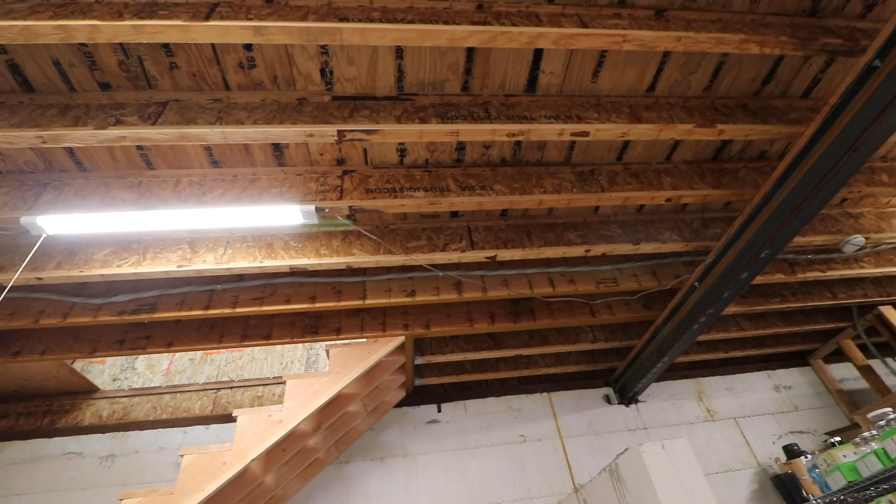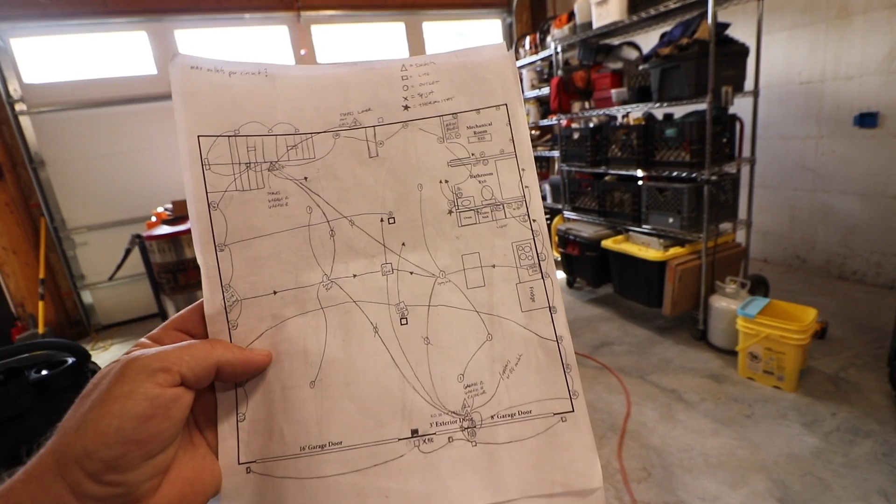So today I want to work on getting things in the ceiling, which is going to be a combination of lights and outlets. I touched on this briefly yesterday, but one of the concerns I have is the fact that we have an I-joist floor deck, and there are restrictions and limitations on how many holes and where those holes can be located in these joists. They're an amazing material that allows us to span distances we probably wouldn't otherwise span, and give us a comfort in the floor that's not easily duplicated, so they're a great option.

The challenge really lies in the fact that we have wire going everywhere, and it's not just the wire that's a problem. We have bathrooms, HVAC, and kitchens, so there's a lot of things that actually need to go through this flooring assembly, and we don't have everything crystallized yet, so it's not obvious where, for example, the ducting is going to go for the HVAC. Maybe somewhere through here, and then it has to go to each bedroom and the living areas. And then also the soil stacks for the kitchen and bathroom will need to run over here and join the main going out to the septic system.

So we know there's going to be a lot going on in the floor, and because of that, with the electrical, we have a lot of discretion, because there's not really a limitation on the length of the wire per se. So we have a lot of control where to put wires. We don't have to run them in a specific place, unlike the plumbing and HVAC, where length becomes a major problem.

I talked to an electrician about this situation, and I have a couple of different sets of house plans from other people's houses. I was looking at the electrical schematic, and it's interesting to me that a lot of this decision making is kind of inferred, or left up to the electrician to make the best decision. It's not very crystal clear, like this wire goes this many inches from the wall for this far, etc.

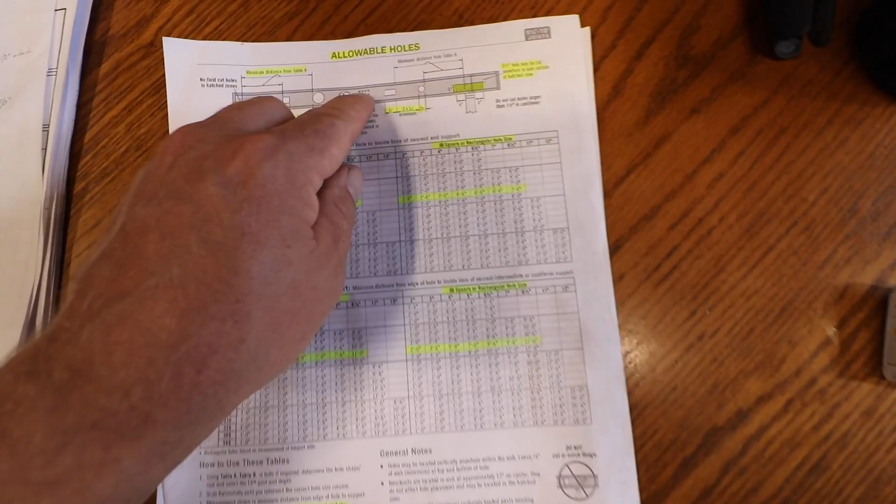It's more like, we want a switch on that wall and we want it to control that light, and the electrician has to decide how to get power to the switch or to the light and so on. So I'm a bit more detailed because we just need more detail—we're not in this industry, we don't understand the norms or the standards. So we're trying to be overly specific so there's no confusion and it's more obvious what to do.

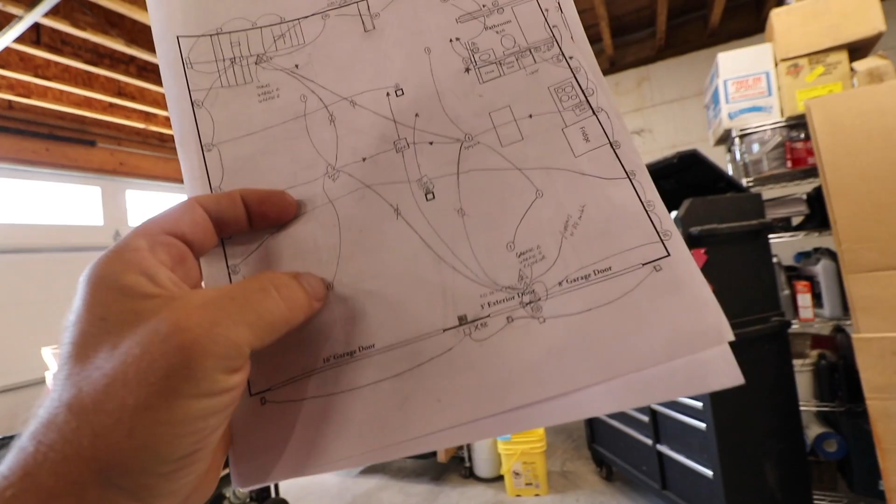So today we're going to be wiring the boxes into the ceiling. I'm not going to run any wires, I just want to get the boxes set up where power is either going to be coming into the box from the circuit, or leaving the box and either going to a switch or going to a light.

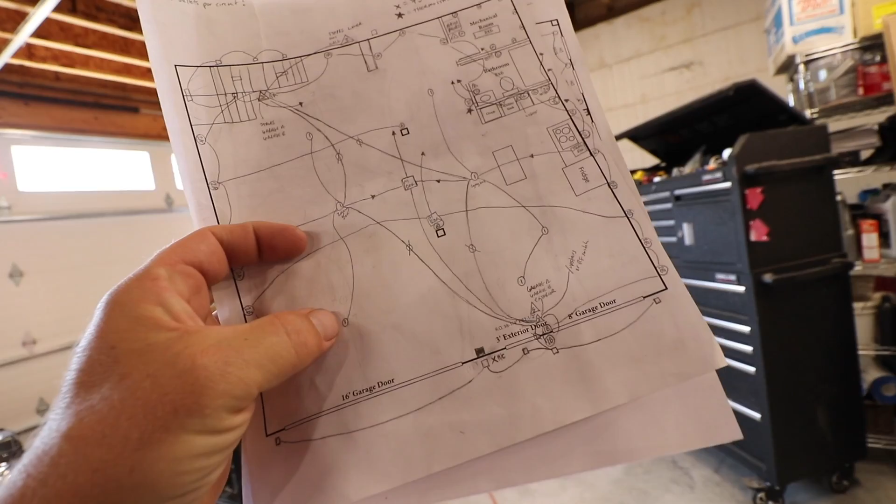We have an electrician coming by in a few days to walk through all this stuff with me and make sure I'm doing things well, that they're thought out, and that it's going to work the way we want with no issues, and ultimately that we're up to code so the inspection doesn't backfire on us.

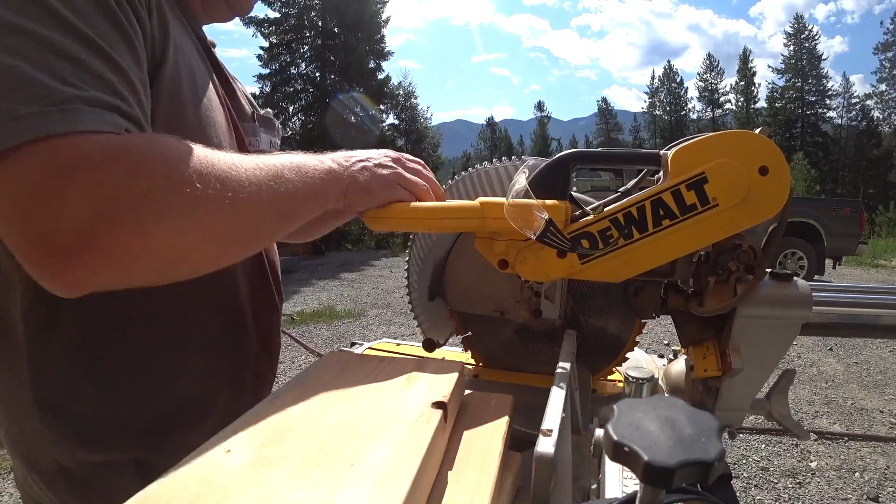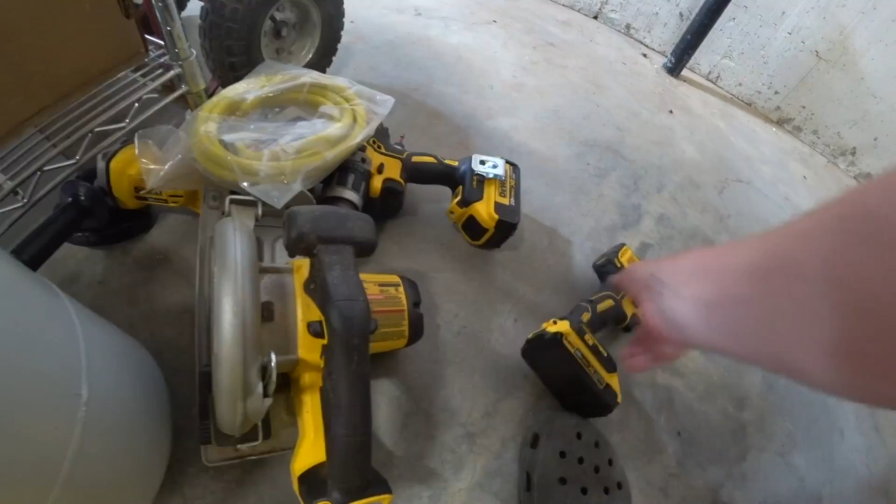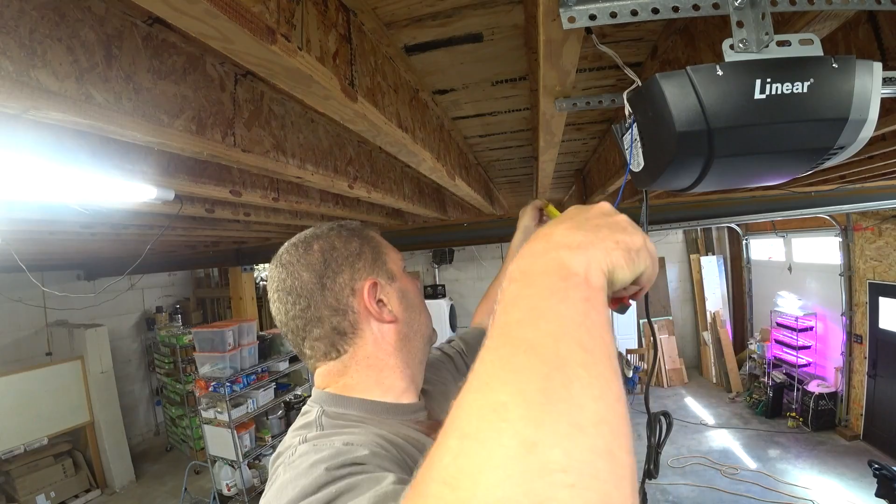I showed this sheet in yesterday's video. This is from the manufacturer of our I-joists, and there are different joist depths and different series within a depth. We have an 11 7/8 joist that's a 360 series, and it gives us a table of hole sizes. We can drill a 5-inch hole, but we have to be 3 feet 6 inches from an end support. This hashed area is off-limits to drilling entirely, and to drill a 5-inch hole we'd need to be 3 feet 6 inches away.

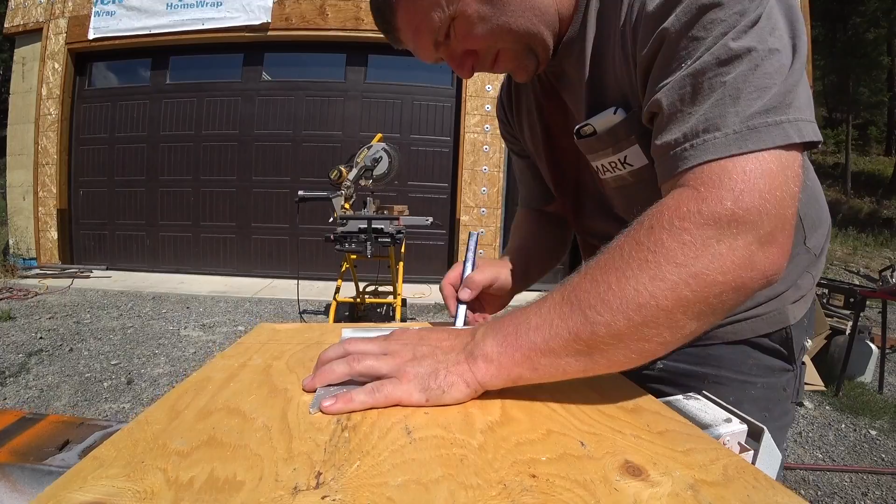This table is something we'll refer to more with HVAC and plumbing, but with electrical we want to be super conservative so we don't drill a bunch of electrical holes in one spot and then later realize we need plumbing right next to it, creating a structural integrity issue.

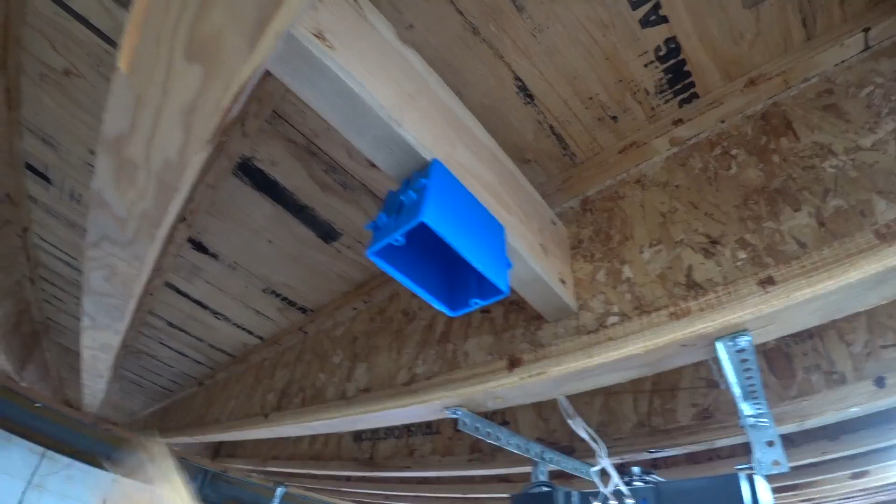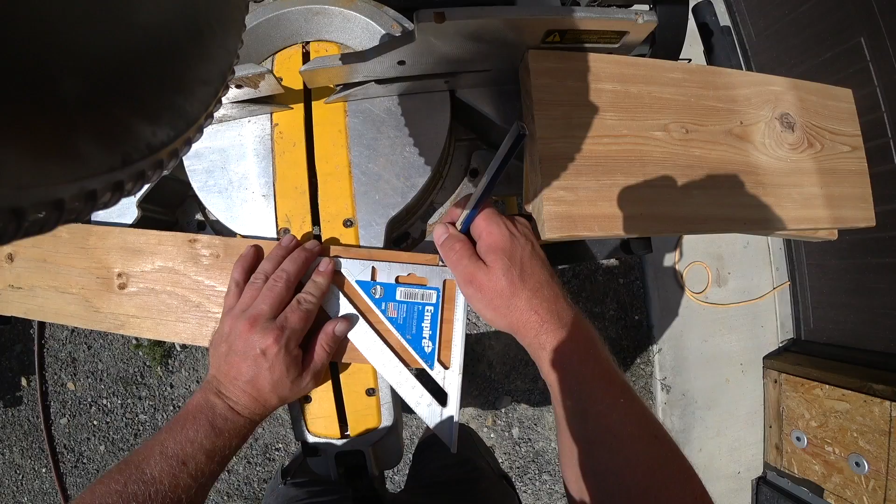The layout of the garage lighting was totally just a circumstantial thing. These lights were actually installed way back before our timber frame even existed. We needed some lighting in here for the timber frame workshop, so I just bought whatever made sense on Amazon, counted about how many we needed, and went for it.

It's kind of weird, but it's actually worked so good, it's been in here for coming up on a year and a half now. So I think we're going to stick with this layout.

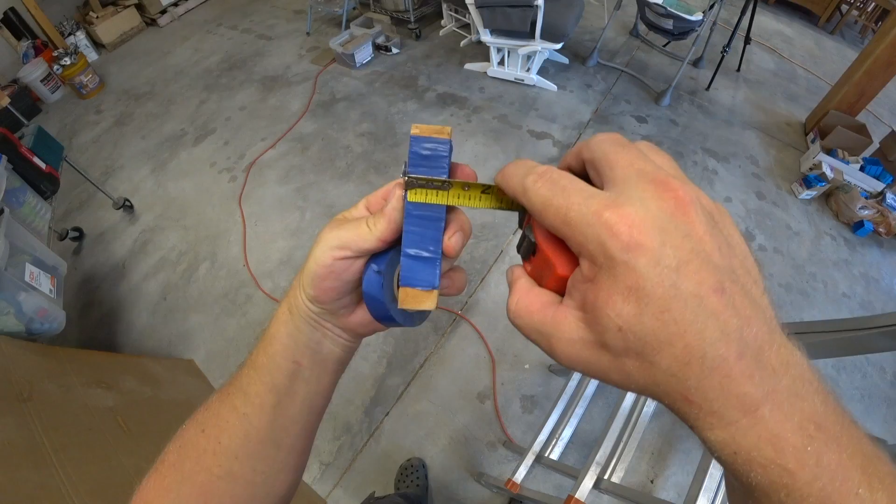The way these lights work is they actually have a regular power cord on them. Because of that, we can run a box over here and put an outlet, then connect two lights into that outlet. So the switch near the door or the stairs will actually control the outlet, and by virtue of that, control the light.

So what we've done is narrowed things down, even though we have 5 or 6 lights on this side and 6 on the other. But we also have a garage door opener, which will be on the same circuit but can't be controlled by the switch, so we'll have to work that out. We're going to use the least amount of boxes possible to control all of these lights.

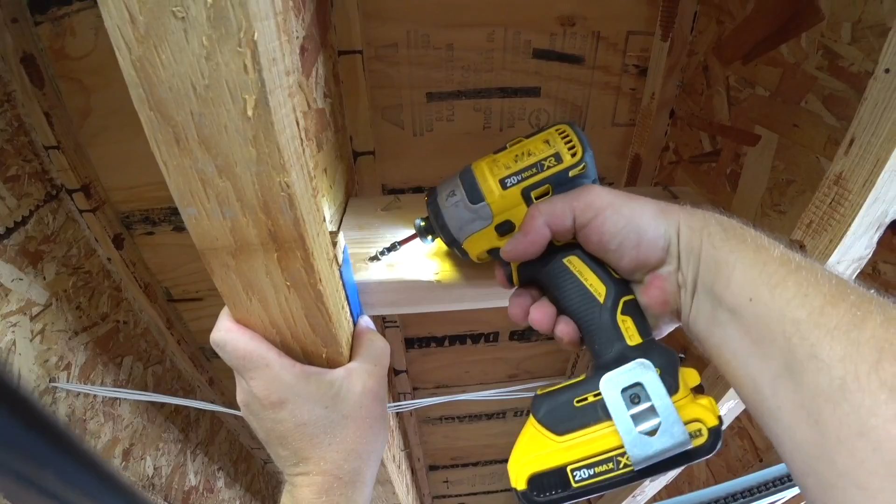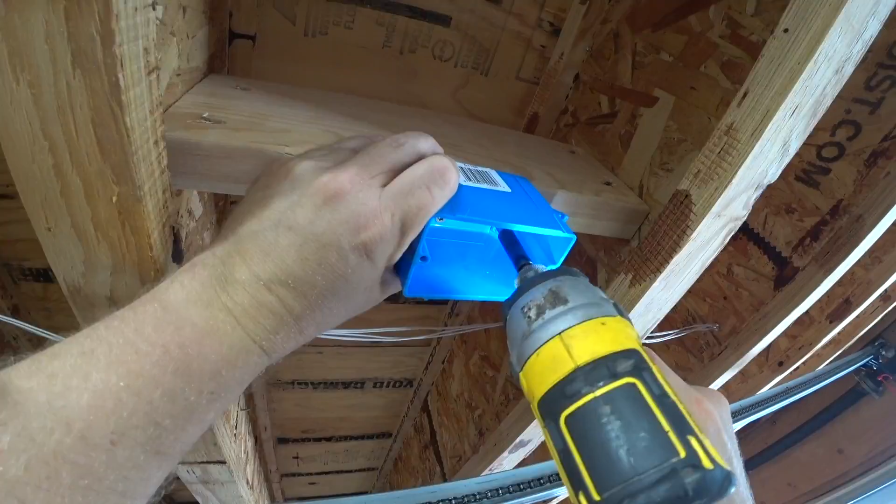Too deep. So what did I do wrong? Totally outsmarted myself — that gap there is actually 1 inch, not 1.5 inches.

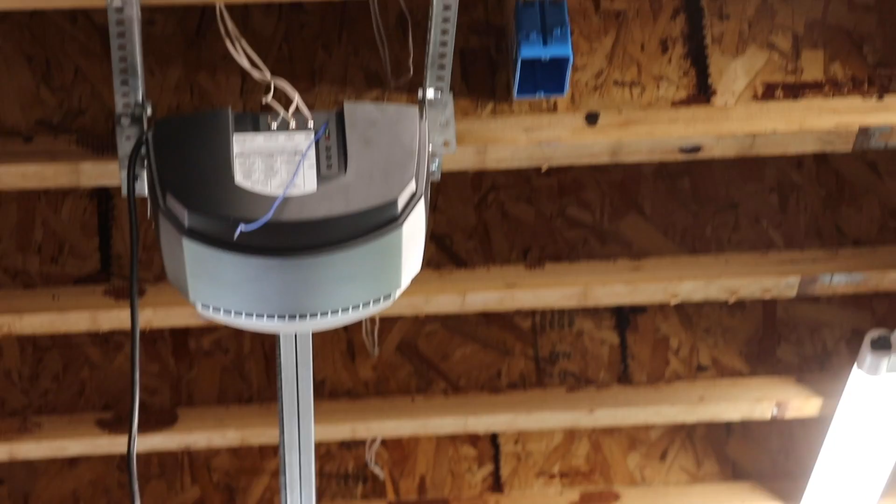This is going to be our sheetrock depth, so that'll be about 1/8, maybe 1/4 behind the sheetrock, which will work super good.

As per usual, the first sheet, panel, or box takes a long time — a lot of just figuring things out. I feel like I've got my spacer figured out, and the blocking and toe-nailing and all that stuff figured out too. So all that seems pretty good now.

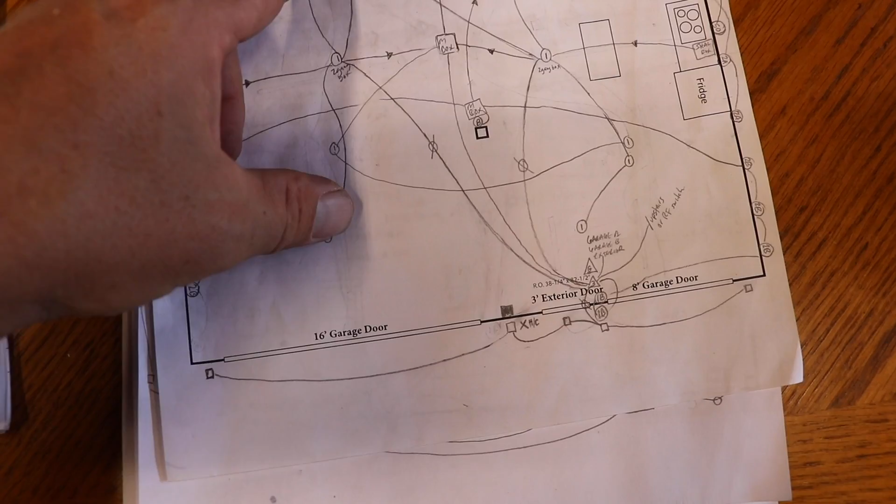I feel like I can just use the system to start rocking on boxes. So we're going to have a bank of lights on the west side and a bank on the east side, controllable from two different switches, so we don't have to have all the garage lights on all the time.

We actually did this through the winter. We don't really use this side of the garage except for projects, because the other side is more like the living side. So we turned all these lights off, and it was actually more pleasant in here — otherwise it just seems industrial.

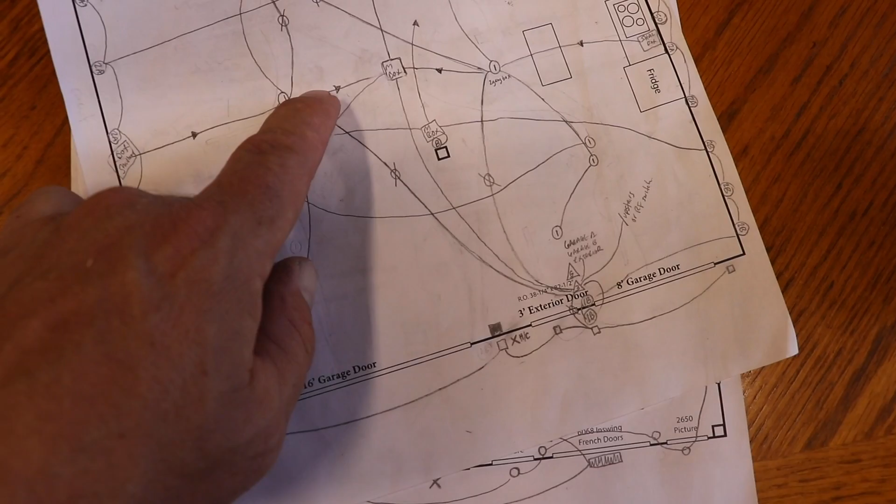So what I think I'll do, so I don't commit myself early to these exact lights, is just space boxes every 6 feet. That way, if we want to change the lights in the future or take on a different lighting strategy, there's a generous amount of options — not too many, but also not just one, you know what I mean?

So let's get boxes about every 6 feet along this side, and let's try that first.

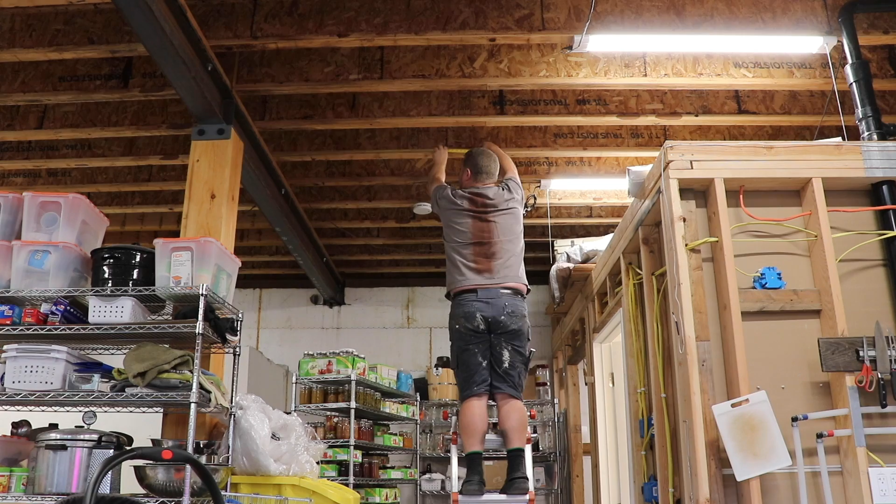So if you count, that's 2, 4, 6, 8, 10 wires. And in a box, the grounds all count as 1. So I believe we'll have around 11 — 2, 4, 6, 8, 10, 12... oh wait, no, there's 10. Yeah, 11 total wires in that box.

The problem is that if you look really deeply into this box, you'll see that these boxes only allow 8 number 12 wires, and that includes the ground.

So if we jump up to a double gang box, this one allows 14 number 12 wires. See it there right below the cubic inches? It says 16 number 14s, 14 number 12s, 12 number 10s. So we can put 14 number 12 wires in a double gang box — or more specifically, a 32 cubic inch double gang box.

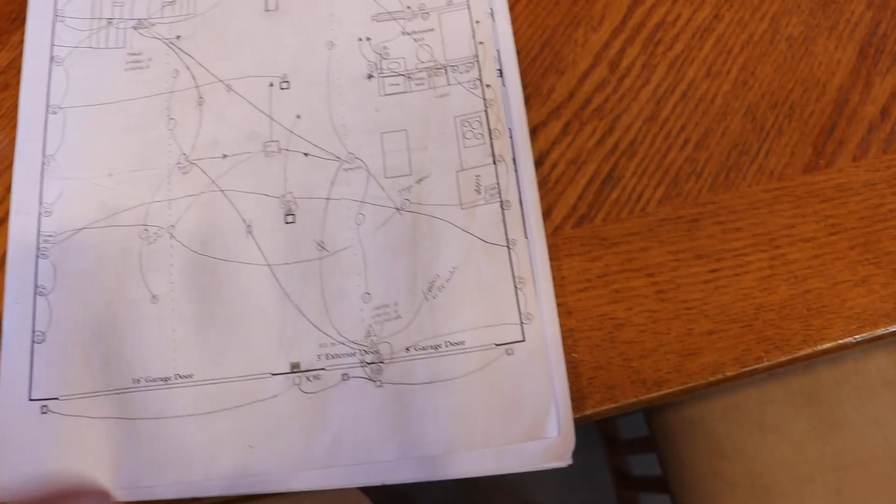So we need something bigger to do what I want to do there. That single gang is going to have to go away. I think standards like this can be a little confusing because we only plan to put one outlet in that box. If we were to put 2 outlets in that box, we'd be adding 2 more wires, because that's wires in the box. So we're going to be putting all those wires with 1 outlet in a double gang box. You follow?

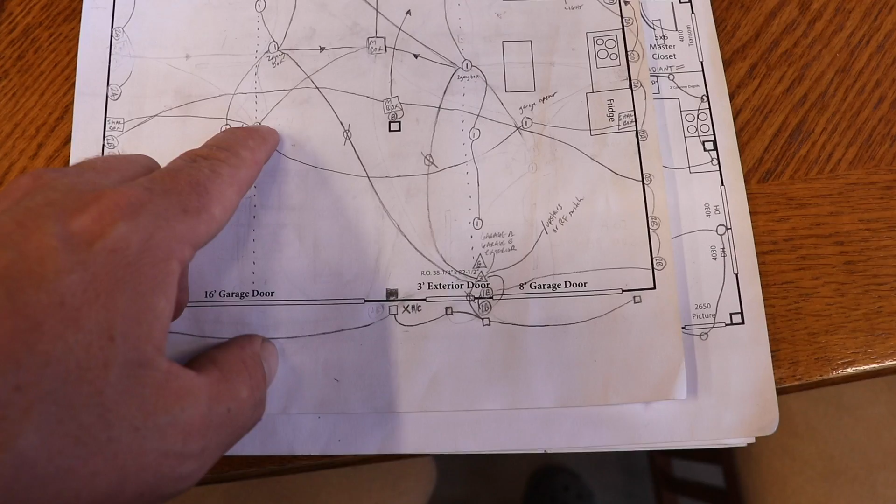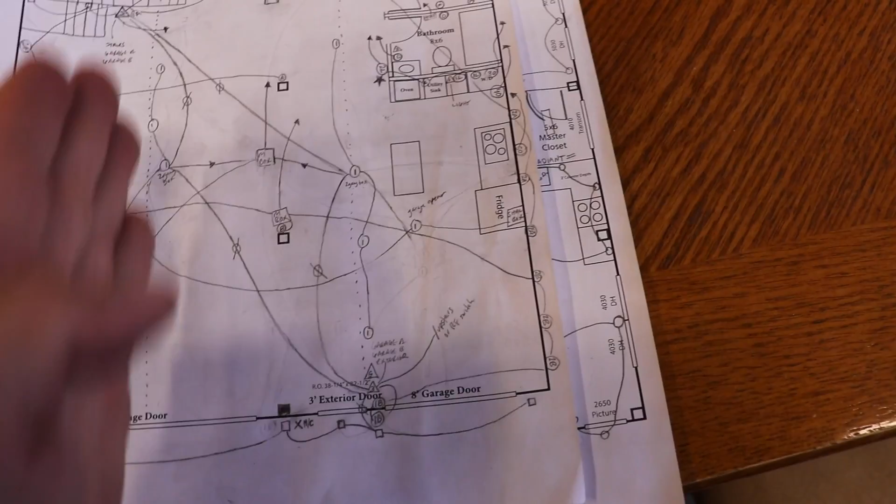Since we're on the topic of boxes, this is a great time to bring up the cost difference between, say, this box — okay, use your imagination here for a second. Imagine this box is this quality. See the quality difference? A little bit of a difference there. So this one isn't exactly the box I'm talking about — imagine this box was made into a double gang.

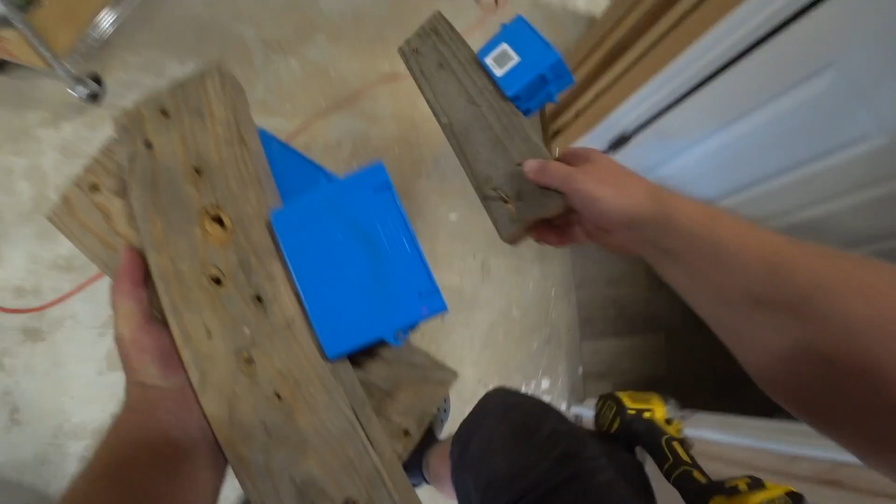This little box right here is 21 cents. The equivalent box here is about 68 cents. So 21 cents for a single, 68 cents for a double. This box is $1.40. So this box is almost 2.5 times more expensive than the equivalent of this style, the nail-on type. Because these are just the standard.

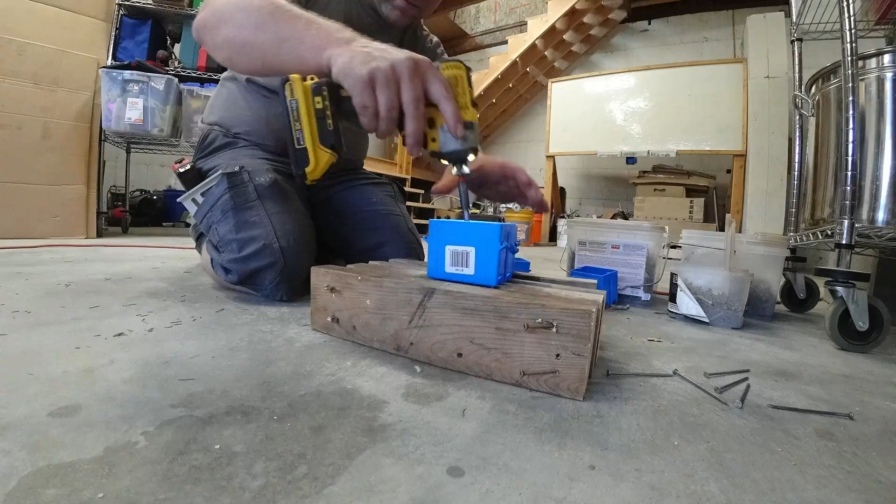For stick-built construction, it seems like pricing pretty much tells you everything you need to know. Everybody buys this style of box because why not? It makes sense — they've got nails already in them, you don't have to have fasteners, you line it up, and they've even got little ears on here for the sheetrock depth. You basically pull that up against the stud and that sets the depth of the box for the sheetrock, and you nail it on super fast, right?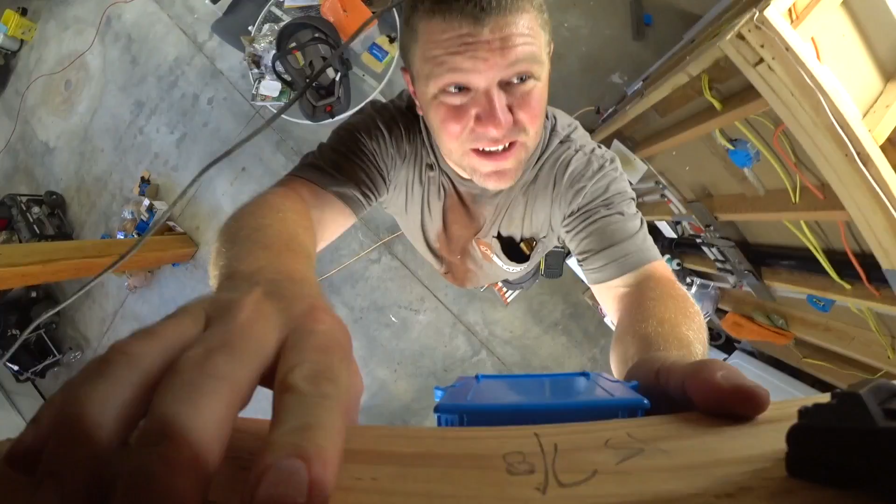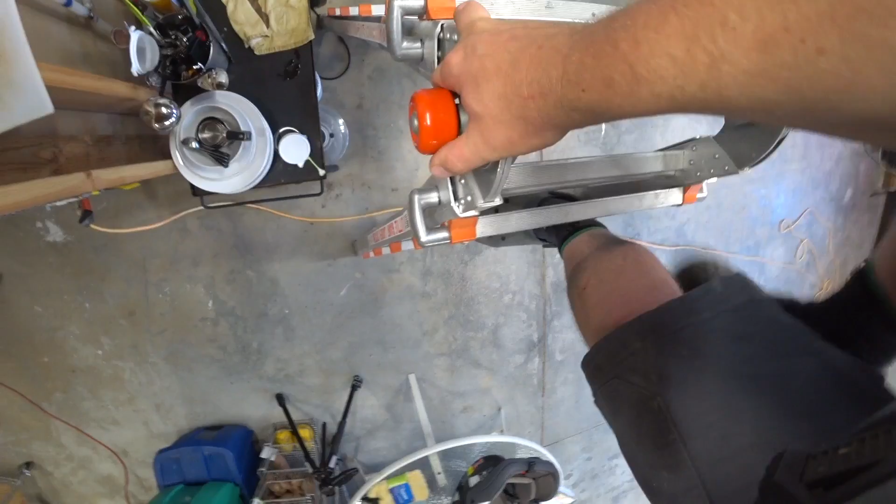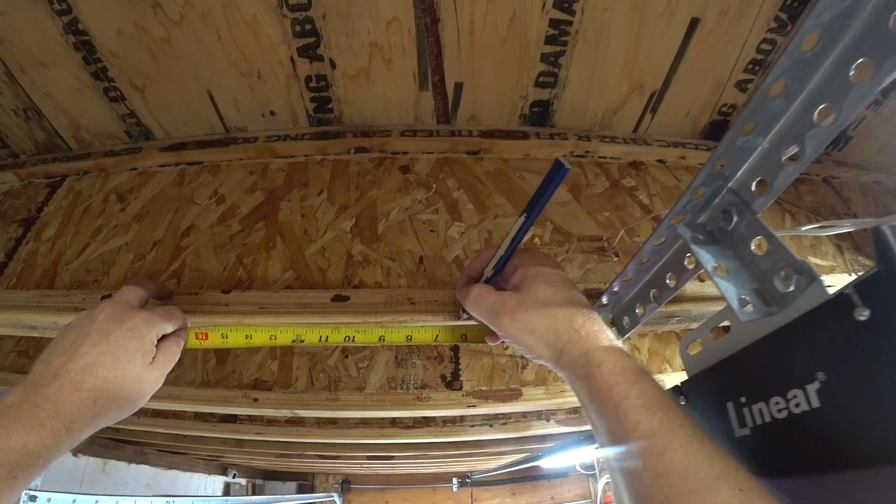So where possible, we're basically using these boxes and just pulling the nails out and using the box as is. Take the nail out, screw it on — 21 cents. You buy this box, the same box, with a little ear on it for fastening, and I think these are like $1.20 or $1.30, so 5 or 6 times more expensive. And if you look at it, it's the same box — in fact, there's not even any nails included. You have to provide your own fasteners.

So my point is, when you're doing construction, if you're thinking of going traditional versus unconventional, and if you get to a stage like this and want to think about how to build, you can start saving a tremendous amount of money, because if we put 100 of these boxes in the house, that could be $100 more than these boxes. You get the idea.

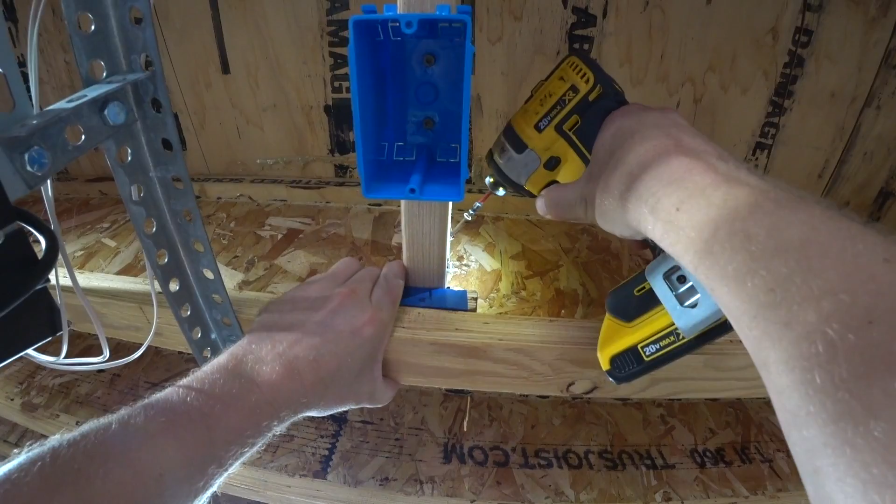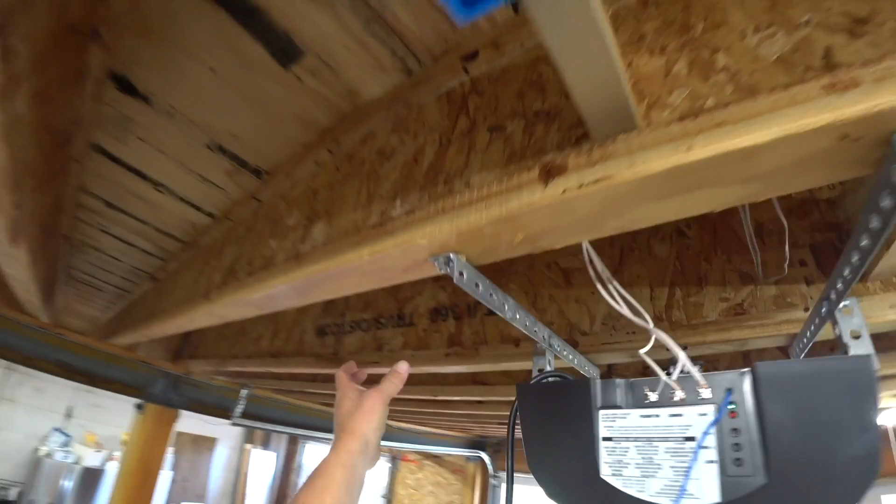So I'm jumping ahead a bit to the actual pulling wire phase, but let's briefly touch on it. I sat here for a while staring at these home runs and wire runs.

There's a really important code requirement that comes into play when you start pulling wire. The code says you're allowed 3 cables or wires in a 1-inch hole. I haven't read the code to see if that changes with a 1.5-inch or 2-inch hole. The reasoning for the 1-inch hole is that if you're drilling in a 2x4 stud, the stud is 3.5 inches thick, so a 1-inch hole drilled in the middle leaves 1.25 inches on either side.

That matters because if the wire is closer to the surface of the stud than 1.25 inches, you have to nail plate it. This nail plate is here because the plumbing is less than 1.25 inches deep, and the same rule applies to electrical. Anywhere you get too close to the surface you need a nail plate, and those aren't cheap—they're laborious and tedious—so if you can, you want to stay deeper than that.

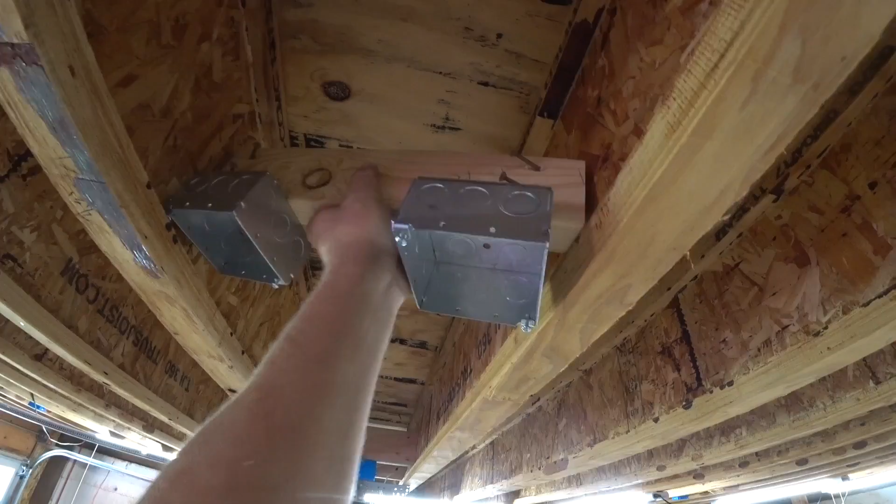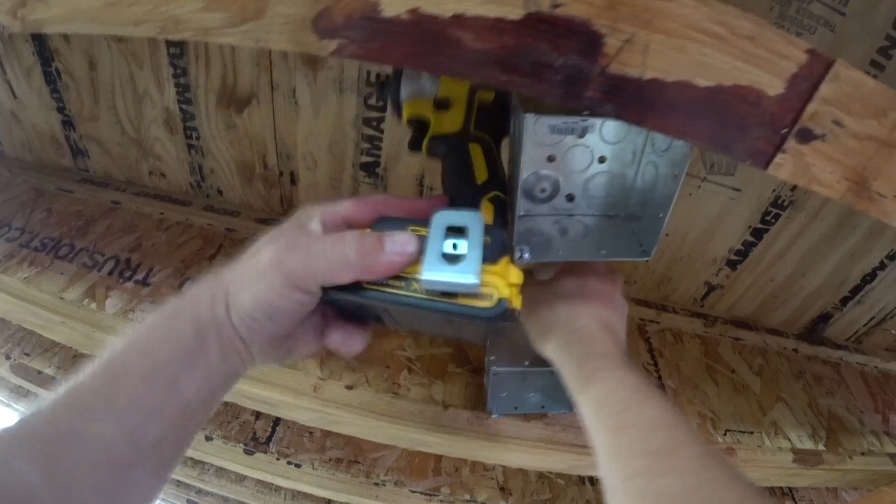I think that's the origin of the 1-inch hole and the 3-wire rule. The 3-wire rule has to do with fire, and the 1-inch hole has to do with 2x4 construction. So with 3 wires in that 1-inch hole, hopefully there's 1.25 inches on both sides of the hole, and therefore we don't need to nail plate that area. That's a long roundabout way of explaining it.

Basically, we're going to be drilling 1-inch holes in the I-joist and running 3 wires per hole. Obviously we want to minimize the number of holes—we went over that earlier.

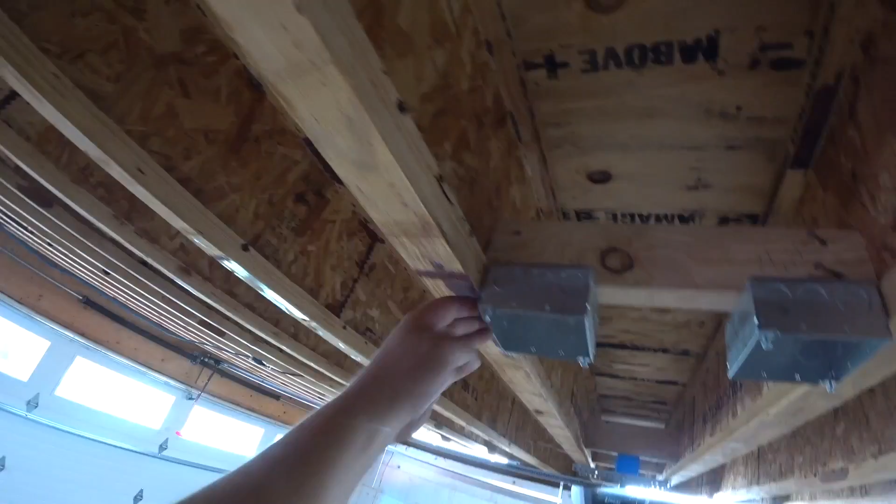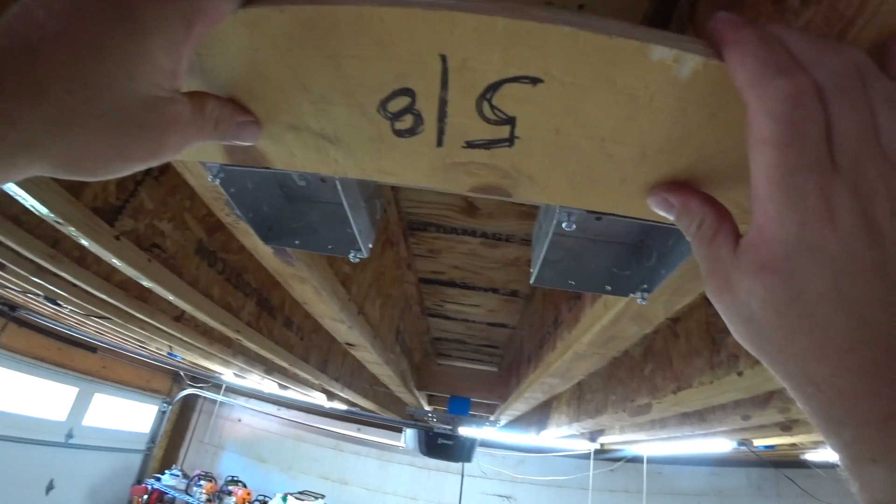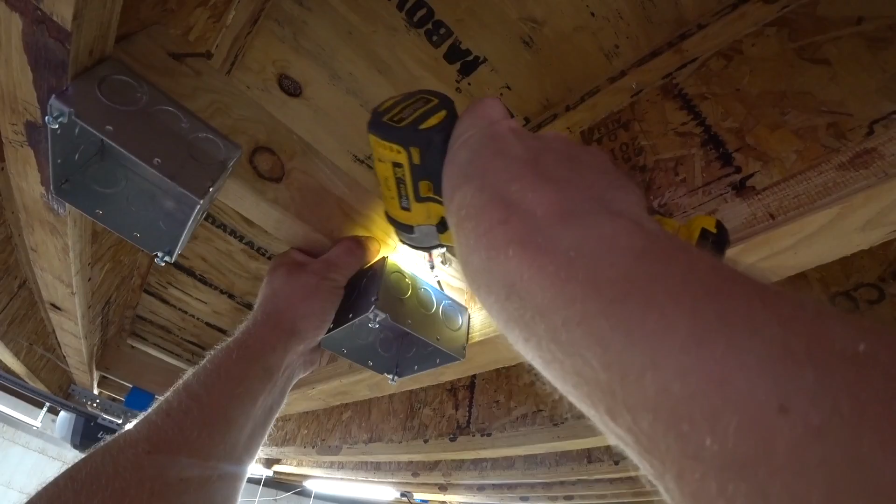Moving laterally this way is actually pretty easy on a joist—it's moving through the joist where we need to be conservative, since we can only put 3 wires through. I know that looks like a mess and it's a lot of words, but I'm jumping ahead to explain why I'm putting boxes where I am, so it makes sense for running wire too.

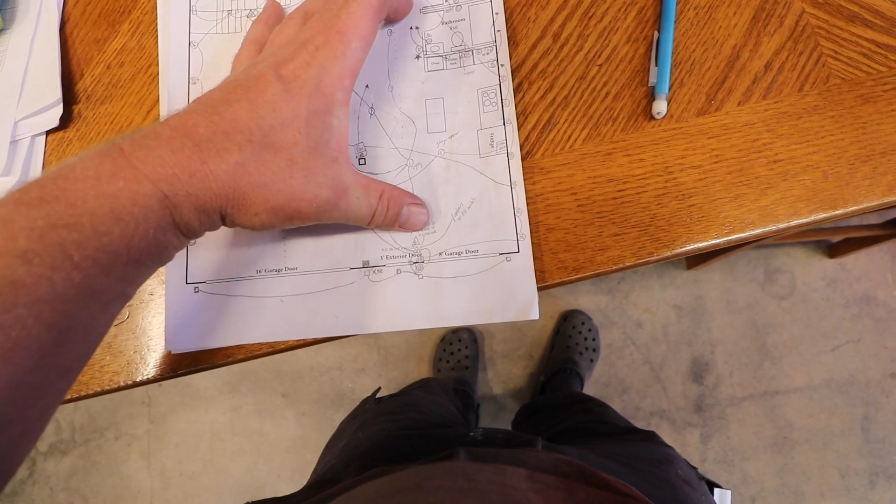Totally made the mistake—oh no, I cut them all too short. So what happens, guys, when you take these measurements but forget to add the flange? I get to go redo all of these boards again.

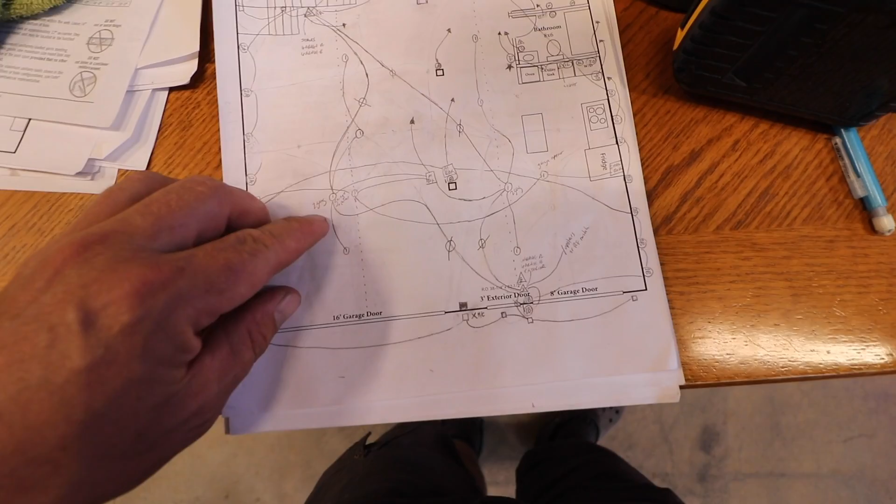Actually made an executive decision to move this box over here, because all the home runs and stuff are actually going to be in this joist bay. We're going to be bringing power over here. I pulled that box off because that's going to be a double gang.

I'll share in a minute—this is actually worse than I thought it was originally, I'll explain why in just a second. But this box right here has got to move over here, so there's no need to go between joist bays. We can keep pretty much all the home runs and stuff right in there.

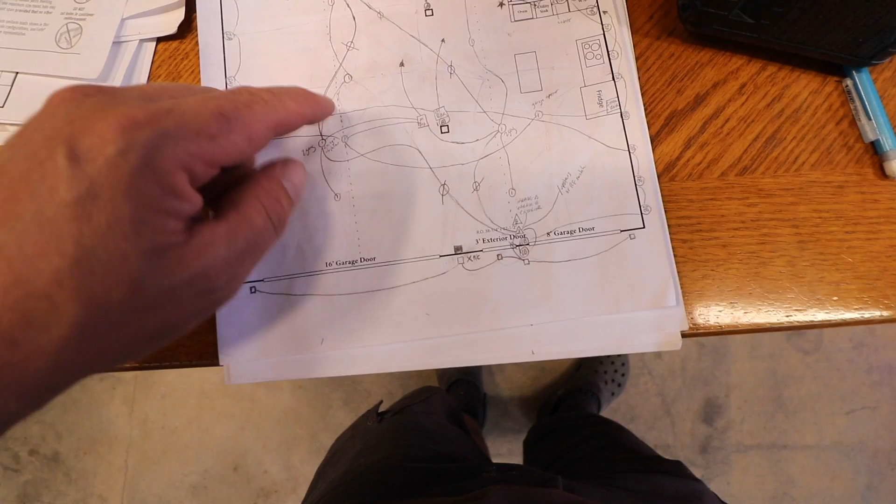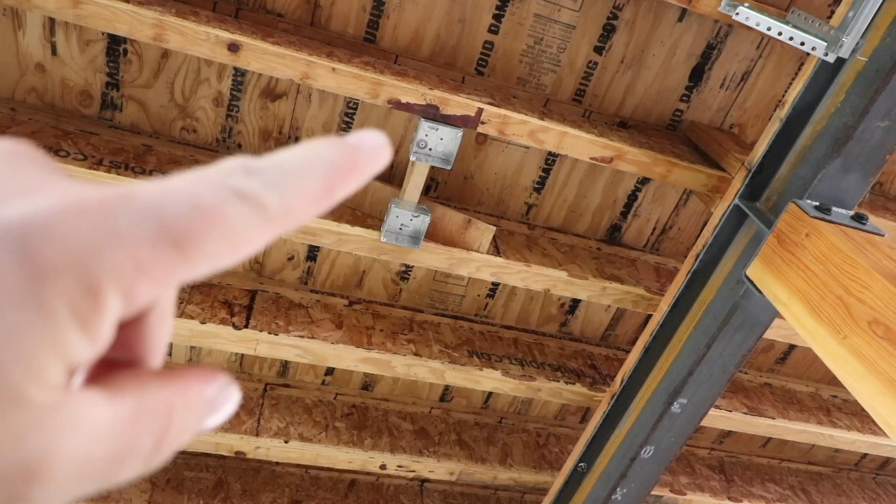Hopefully this fits in here. Oh yeah, nice, go there. That's a little snug, actually. Go right in there—let's see, I think that was like 5/8 inch, so we'll just put it at 1 inch. Oh yeah, then there's room to come in the side there. There we go, that'll work.

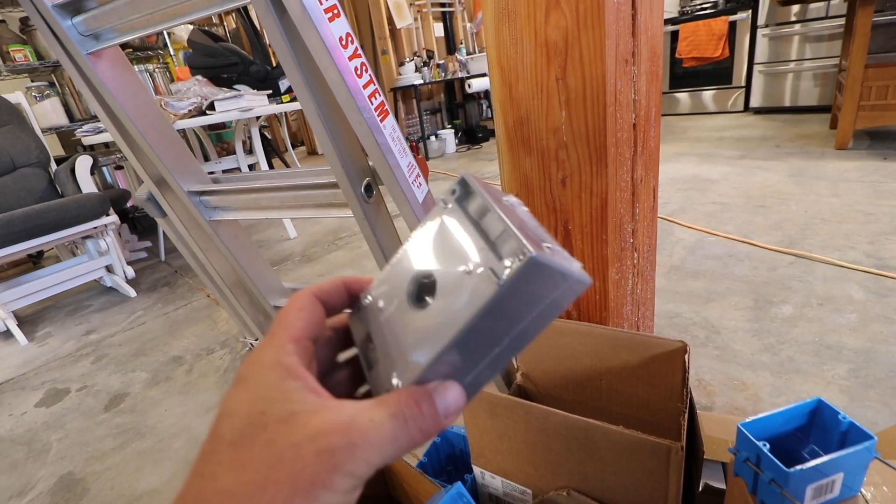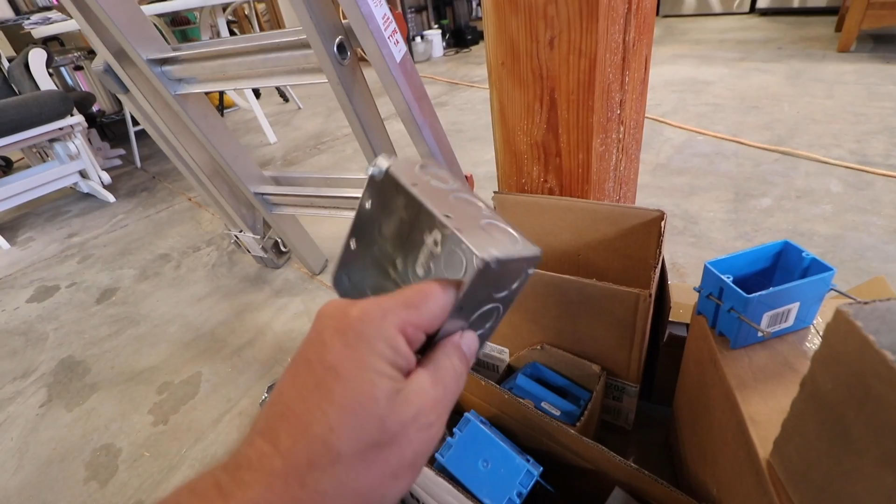That's too big—now we've got to move this. Measure that right there... sure looks like it's too much to me. Yeah, it looks way too much. I don't know what's going on there.

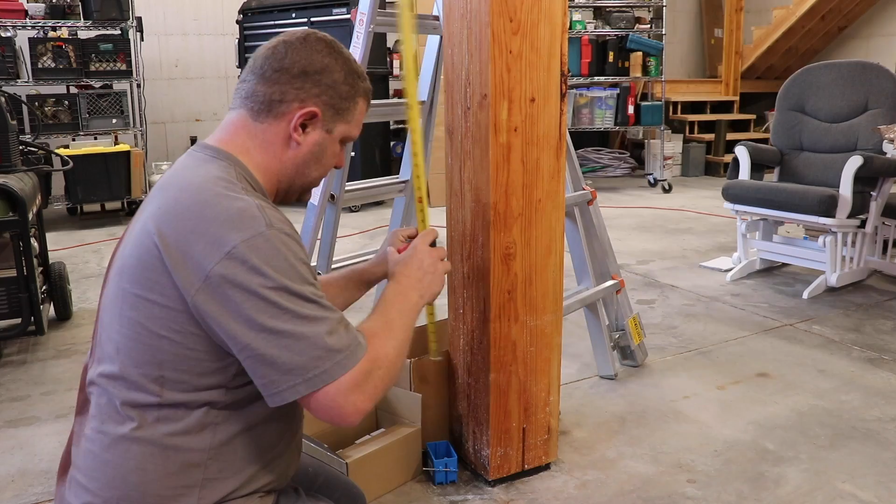That's actually pretty tidy right there, though it's a little over. I'm not sure what's going on with that, but I guess there's no reason not to push that up. And that cover actually fits inside of that, so I don't think it needs to stick out. Man, I did a horrible job getting those boxes on there square—sticking out slightly. The whole thing's just cattywampus.

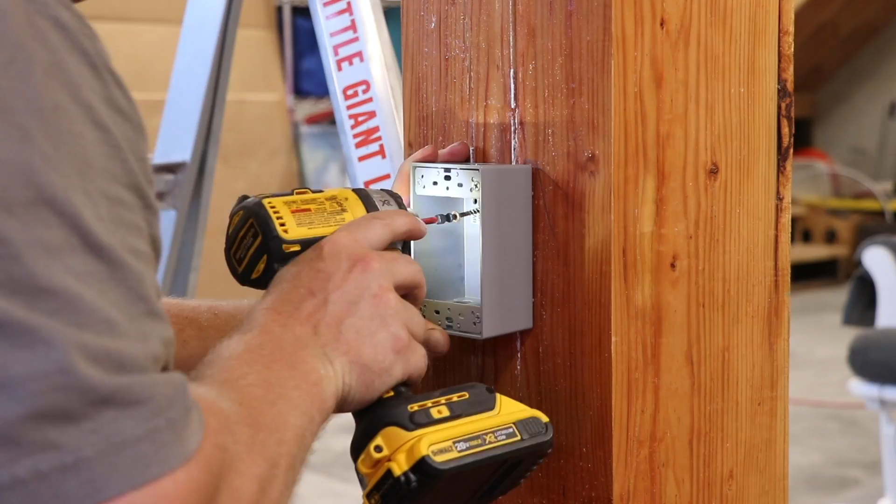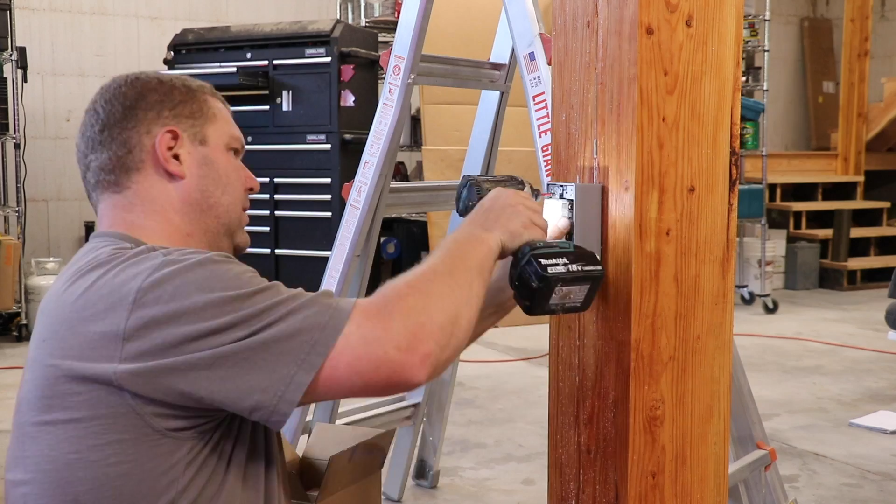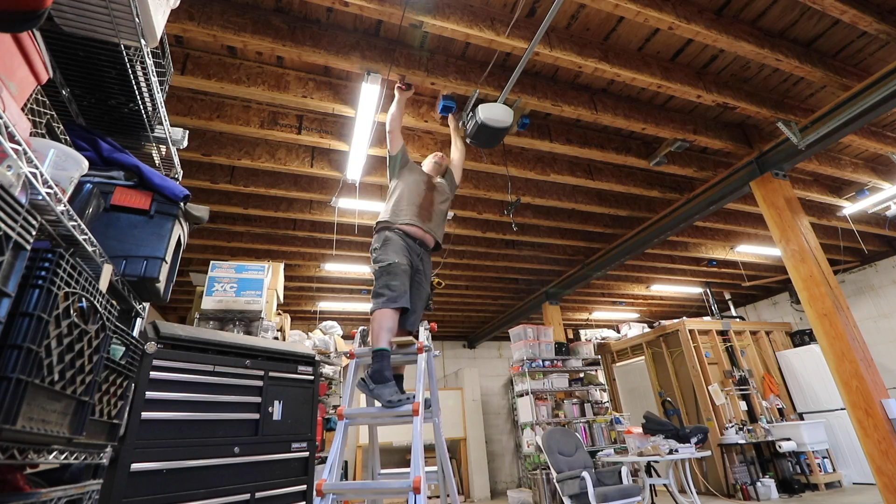All right, so we are really honking. We've got all of the ceiling boxes on the west side, all of the ceiling boxes on the east side. We've got power to the garage door openers. We've got each box for the lights. We set the 2 junction boxes where power is going to be coming in from the light circuit and where power will be coming in to feed these south wall outlets.

So why is this a worse situation with these 2 gang outlets than I originally thought? Someone mentioned quite some time ago in a video comment that they really appreciated having switches all over the place to keep them from having to go upstairs or downstairs to turn lights off that they either forgot to turn off or noticed are on. We're going to be trying to really optimize the house for that convenience.

One way we're going to do that is with 3-way switches. So everything in the garage here, near the entry and near the stairs, is going to be a 3-way switch. There's going to be somewhere either upstairs, in the case of the stairs, or at the door and the stairs, so you can go from here to there and all the lights can be turned on and off. The problem is it takes a lot more wire to make these switches work than a normal switch. I think I'm going to play with this in a different video, more for fun and kind of learning.